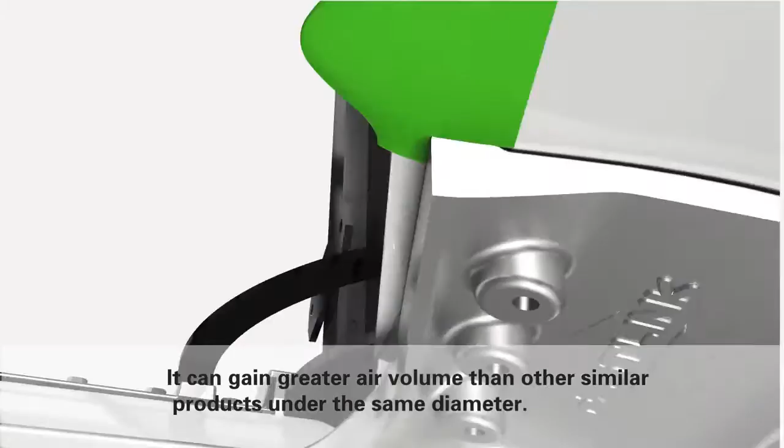FastLink Industrial Big Fan owns green technology from the ocean. Its unique blade design has already passed the patent of whale power technology. It can gain greater air volume than other similar products under the same diameter.

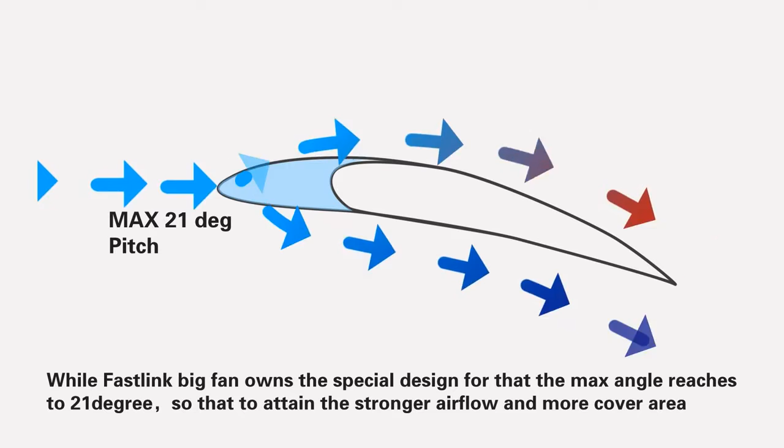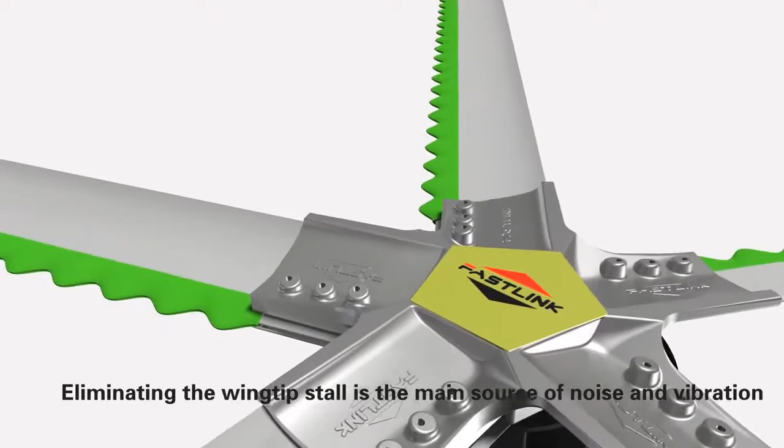A greater pitch to provide more air movement will normally cause a typical airfoil to stall, but FastLink Big Fan owns a special design with a max angle reaching 21 degrees, attaining stronger airflow and more cover area while largely reducing the possibility of fan stall. Eliminating wingtip stall, the main source of noise and vibration, the FastLink Fan can greatly increase efficiency, reduce noise, and increase airflow.

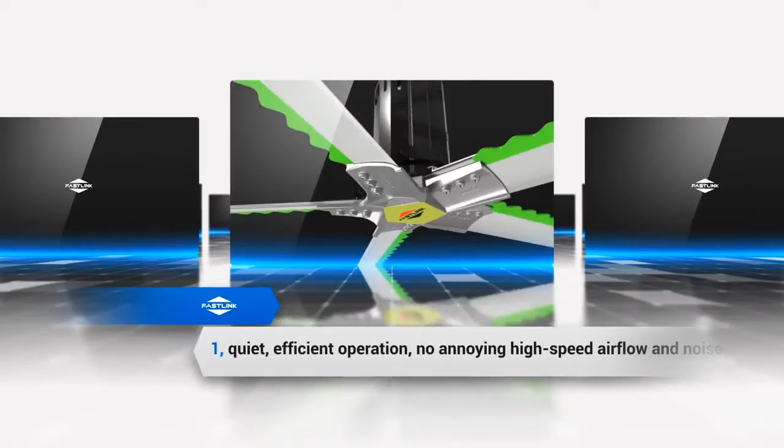The unique patent design brings the Big Fan several advantages: 1. Quiet, efficient operation with no annoying high-speed airflow and noise. 2. Almost maintenance-free, with inspection recommended once every 20,000 hours.

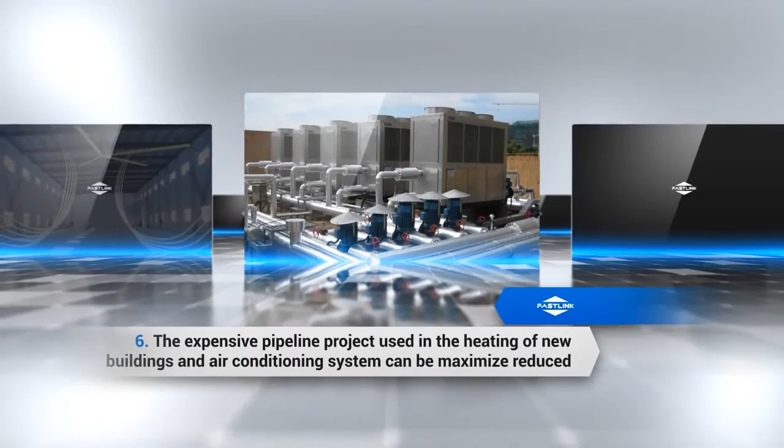3. Low operating costs. 4. Greatly reduces the influence of indoor air when doors are frequently opened or closed. 5. From floor to ceiling and wall to wall, it provides a constant, uniform temperature. 6. The expensive pipeline projects used in heating of new buildings and air conditioning systems can be greatly reduced. 7. A comfortable working environment can greatly improve the efficiency of production personnel.

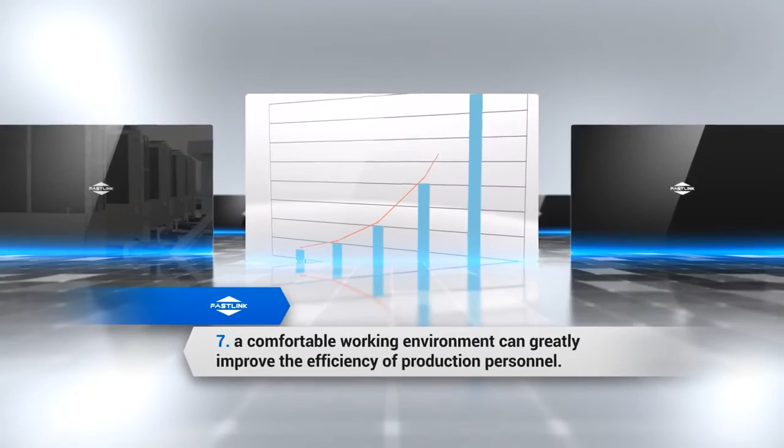The size of the fan: the maximum diameter of the running fan is 7.3 meters.

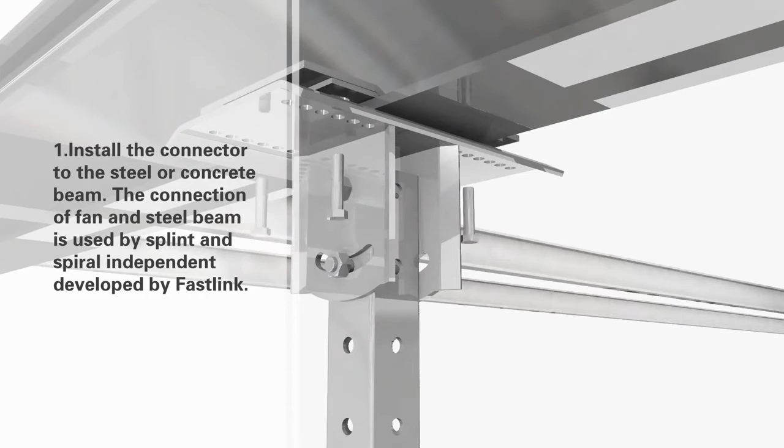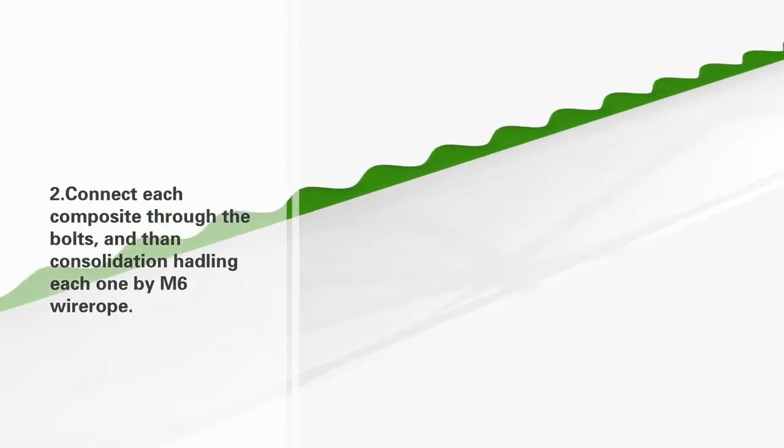Installation steps: 1. Install the connector to the steel or concrete beam. The connection of fan and steel beam uses a splint and spiral independently developed by FastLink. 2. Connect each composite through the bolts, then consolidate each one with M6 wire rope.

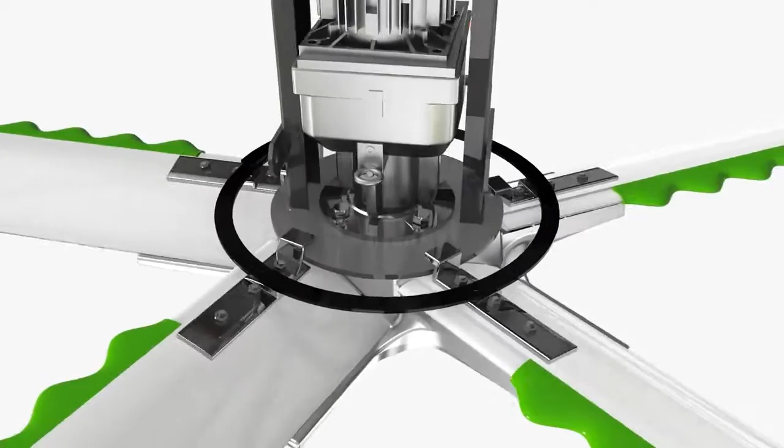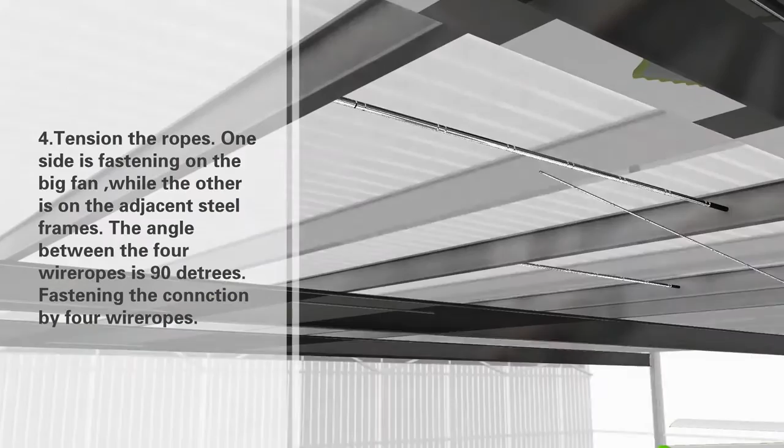3. Install the blade, reinforcing it with bolts and a circular mounting block. 4. Tension the ropes, with one side fastened on the big fan and the other on the adjacent steel frame. The angle between the 4 wire ropes is 90 degrees, fastening the connection.

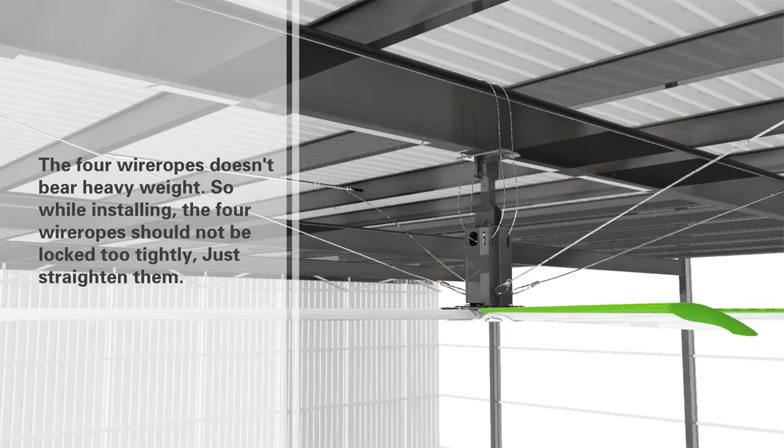The 4 wire ropes don't bear heavy weight, so while installing, they should not be locked too tightly — just straighten them. The method of connecting wire is 380 volt.

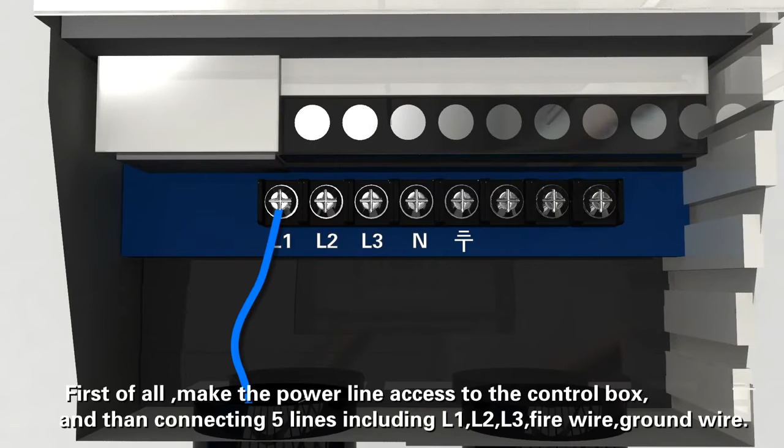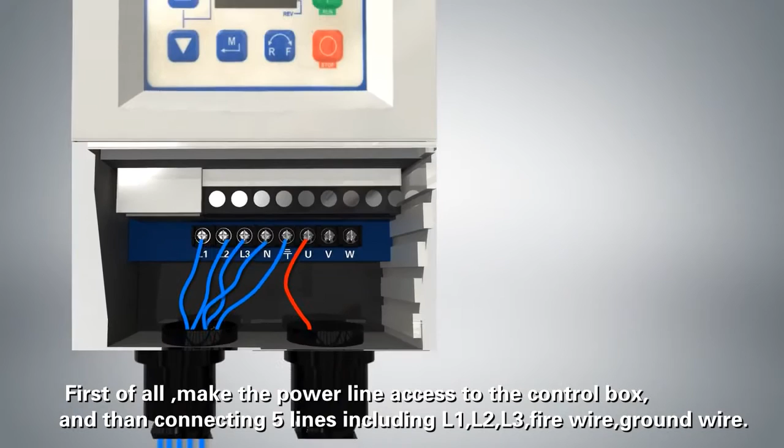First, make all the power lines access to the control box, then connect 5 lines, including L1, L2, L3, firewire, and ground wire. There are 4 wires out, with 3 terminal blocks in U, V, W corresponding to each control box, connecting to each other by copper plate. Running test.